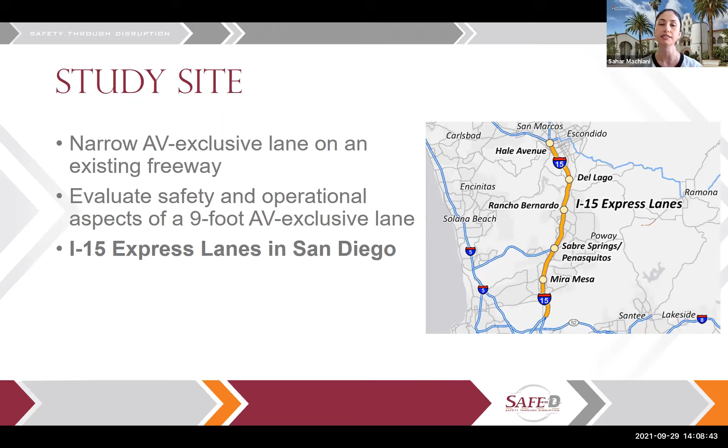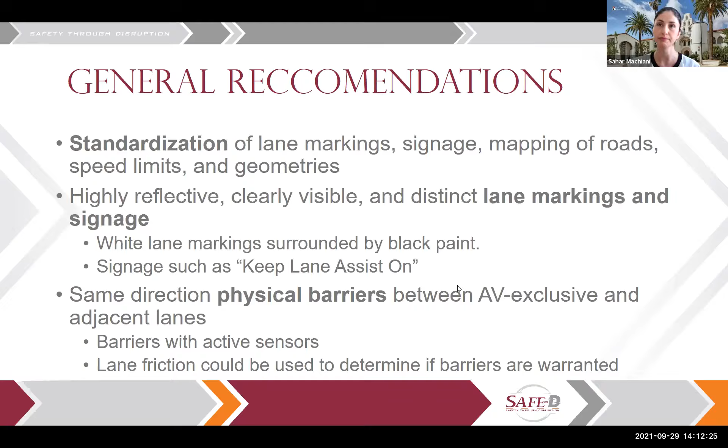Depending on traffic condition and market penetration rate, restrictions should be placed to designate the lane as AV exclusive, shared with HOVs, or open to all traffic. There are expert recommendations suggesting that an MPR of 10 to 30% may be sufficient to make AV exclusive lanes viable, and that an MPR over 50% may warrant the commissioning of AV exclusive lanes.

AV application limitations should be taken into consideration. For example, some AV lateral control systems, such as lane departure warning systems, are effective above certain speed, are operational for certain speed range, and do not perform well, for example, in sharp turns, during low visibility, or in foul weather conditions.

Early education and training at the driver's license level, as well as extensive public outreach via internet, social media, and other campaigns are recommended to explain how the lanes should be used or not used by AV and non-AV drivers. Simulation modeling with real-world traffic data specific to the candidate site could be significantly helpful in making informed decisions on feasibility, limitations, and specification of the AV exclusive lane.

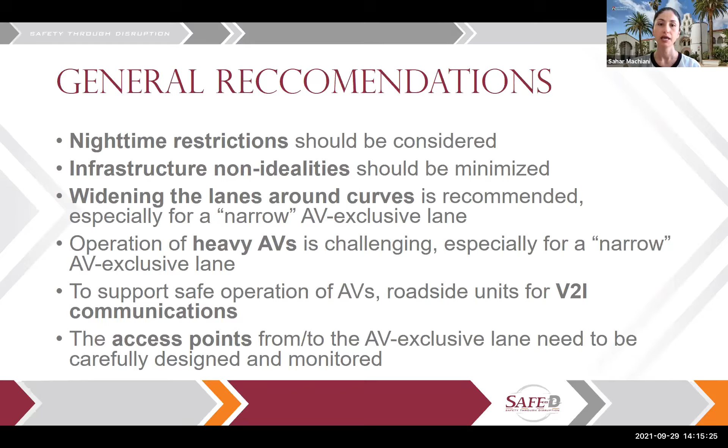Thank you so much. I'll be happy to answer questions after our next part of the presentation by Ali. So Ali, you could start presenting your work, and I'm gonna mute myself for now. All right, thank you, Sahar.

So I'll talk about the microsimulation part of our study. So here we're just going to do a brief introduction of the microsimulation. Based on a definition from the FHWA, microsimulation is modeling of individual vehicle movements on a second or sub-second basis for the purpose of assessing the traffic performance of highway and street systems, transit systems, and also pedestrians.

So there are several steps that go into developing a microsimulation. The first step is the data collection and preparation. For our case, it included collecting the lane configurations, collecting volumes, and some local parameters like that. And the second step is developing the base model, which is basically putting together all the information that you have in the software. The third step is error checking.

For our case, the error checking mostly involves checking that the alignment of the roads is fine, that things like vehicles disappearing don't happen, that the transition lanes are aligned right and connected right to the network, and all that sort of checking that you usually do with a simulation. The fourth step of the simulation is a calibration process where we run the simulation several times until we have a network and a simulation that fully represents our conditions that are currently on the road.

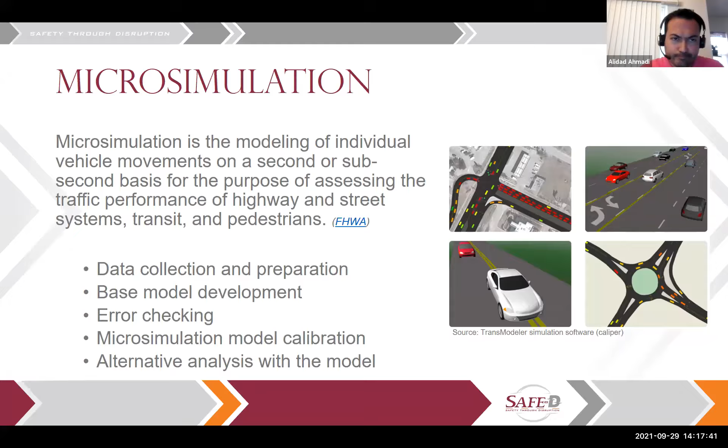So in our simulation study, we have 3 scenarios that we are looking at. The first scenario, which we call the existing scenario, is the baseline scenario with the existing network and the existing volumes that are on the roadway. The second scenario that we looked at, which is called AV, is using the same volumes, but with the adoption of some percentage of the AV vehicles on the road. And the third scenario, which is the ultimate scenario, which we call AVL, is existing volumes with the proposed AV exclusive lane and the adoption of the AV vehicles on the network.

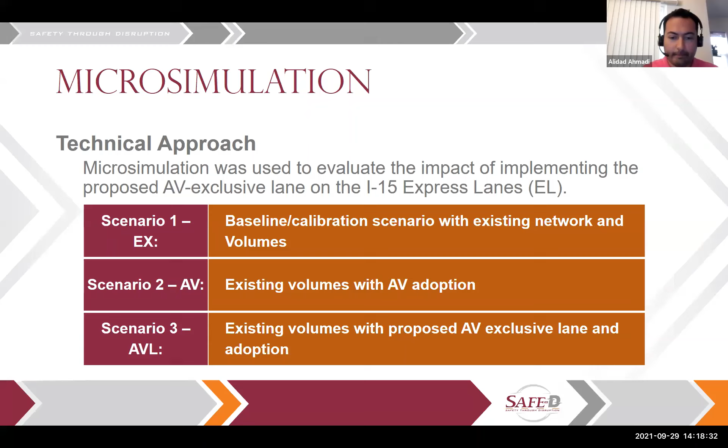Next, please. So the simulation network that we have put together here was conducted in the TransModeler SE edition. At the time, we had access to version 5, which was the latest one. The simulation network is a 5-mile long part of the I-15 corridor, bounded by State Route 56 on the north and State Route 163 on the south side. And there are 4 main interchanges in between these two boundaries, which is basically, if you're familiar with San Diego, one of the busy sections of the freeway during the commute hours.

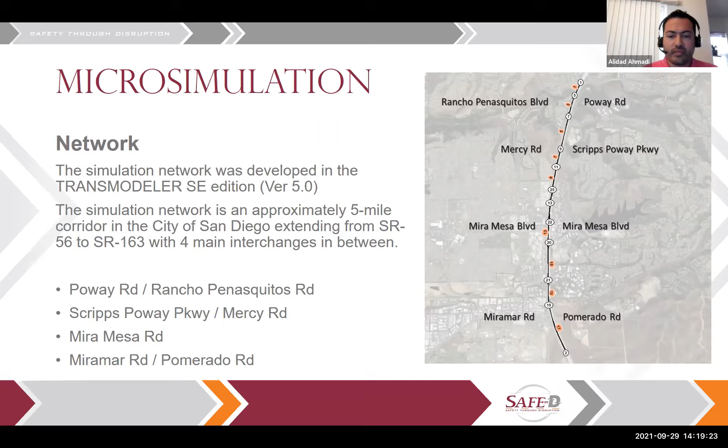So as Sahar mentioned, the I-15 has 2 configurations, separately for AM and PM commute hours. And here we have modeled it for the AM commute hour, which is basically 3 lanes going southbound and 1 lane going northbound. Next slide.

So the existing volumes that we used for this simulation exercise were received from Caltrans, and the data represents a typical weekday in the month of October of 2019. And the data collection was conducted for the AM peak hour, which is 7 to 9 AM. Next one, please.

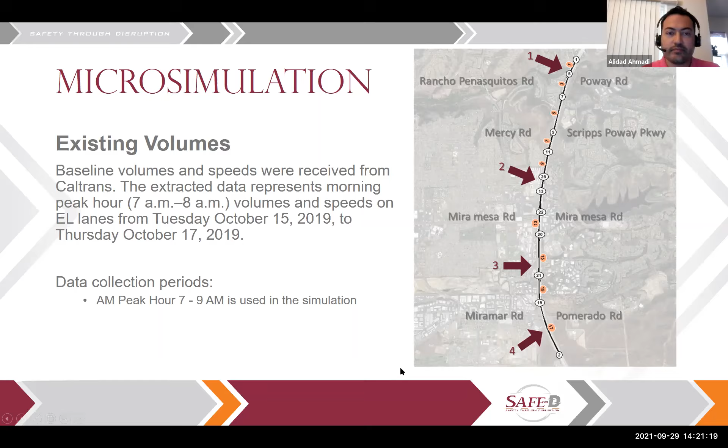So there are several assumptions that we have included in the simulation. The first assumption is road classification. We have gathered some of this information from Caltrans and some of it from the standard guidelines. Some of these assumptions are the saturation flow rates, the speed limits on the freeway, the free flow speed, and the speed distributions on the express lane. Another assumption made is that heavy vehicles were not modeled in the simulation, and the reason is that it was assumed that heavy vehicles are probably not allowed to use the express lane in the future.

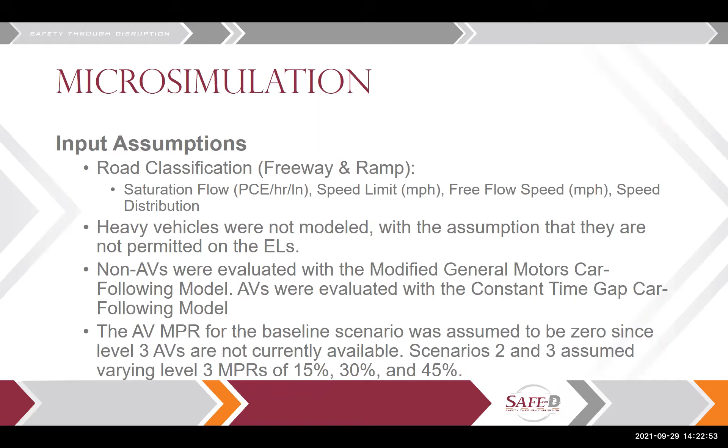And all of the non-AV vehicles in the simulation model were evaluated based on the modified General Motors car following model. And all the autonomous vehicles were evaluated using the constant time gap car following model. More details about those models can be found in the instruction files of the TransModeler software that we use. And at the end, the AVs were adopted in the simulation through 3 market penetration rates, or MPRs, which are 15% AVs on the road, 30% AVs, and then 45% AVs on the road. Next one.

And for those of you that are interested to know a little bit more about the simulation, the way that we implemented the AV lane on the network was by designating an exclusive AV lane in the software by defining a prohibition rule for the AVs to use certain lanes. So as you can see on the right picture, all the AVs were designated to use lane 1, which is the far left lane in the southbound direction, and lane 2 and lane 3 were specifically designated for non-AV vehicles.

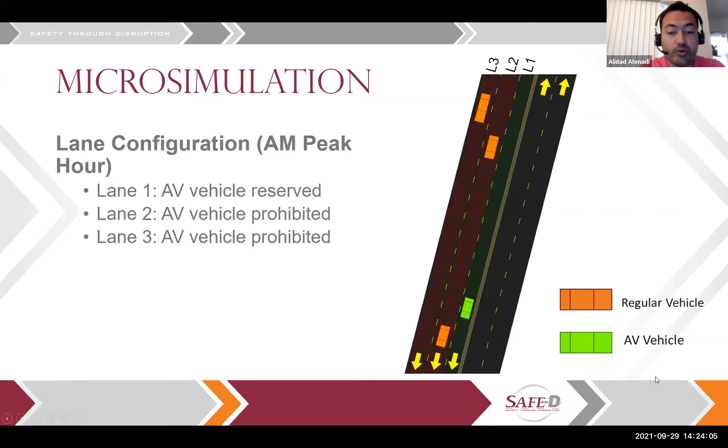So the only way an AV vehicle could get into lane 2 and lane 3 is if they're exiting the express lane, or if they're entering the express lane, then they would cross over those 2 lanes to get to the AV lane. And that's the trick that we used in the simulation network to simulate these new proposed conditions. Next one.

So the validation of our simulation included 60 minutes run of the simulation with the existing volumes and existing network, which also included a 15-minute warm-up time at the beginning of each simulation. We had several sensors along the road that collected the data, and then we compared those data to the field data that we have, the outputs from the simulation versus the numbers that we got from Caltrans.

We use a method called the GEH method, which is basically comparing those 2 values through some formulas, and then the low GEH value, which is recommended to be less than 5, is considered a well-calibrated model in a simulation. So on the right side, you see that we have the scenario starting from, for the southbound direction, starting from north. We feed the simulation network with the volumes, and then as they go south, we record the data on multiple locations, and we run the simulation several times. We get the GEH values until we get to a reasonable one, which indicates that we have a reasonably calibrated model to use.

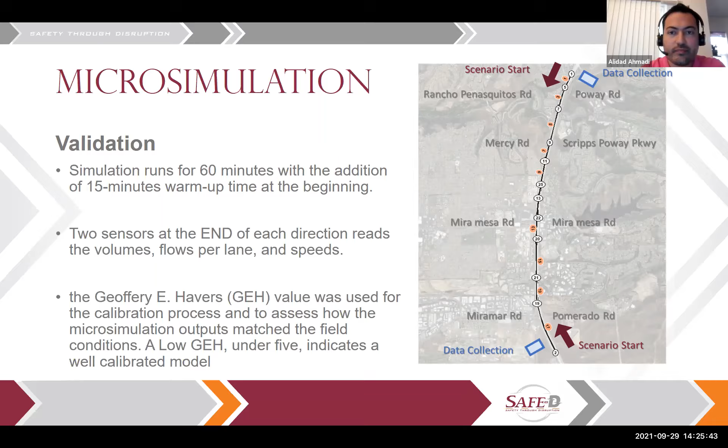Next one, please. So here is a summary of the calibration that we made. So as you can see on the table, the last 3 columns, there's a delta volume, which is delta between the field volumes and simulation volumes, delta average speed, which is speeds on the field versus speeds in the simulation, and at the end, the GEH value that was calculated.

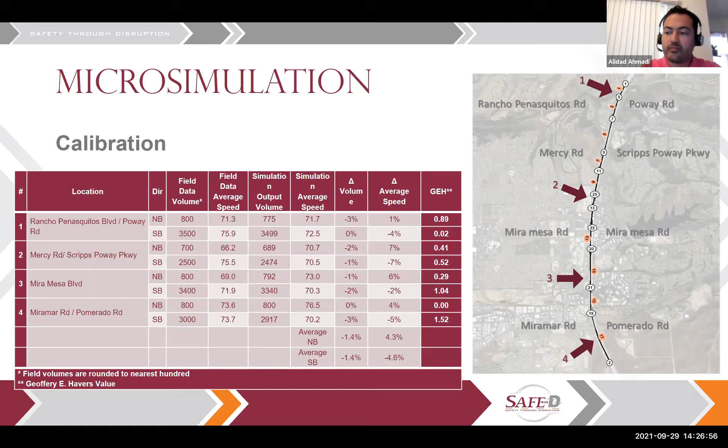And as you can see, on both northbound and southbound direction that we run the model, we got very reasonable numbers. The volumes were as close as 2% to the actual volumes from the field, and speeds were as close as 5% to actual speeds on the field. And same for the GEH value that we calculated. So all of the GEHs that we calculated were well below the 5.0 threshold. Next slide, please.

So the microsimulation results at the end were reported and reviewed under 4 following selected metrics, which is the traffic flows on multiple locations on the network, the average density, the average speed, and at the end, the speed differential between the lanes. So the speed differential between the lanes in our study was defined as the difference between the speed of the first lane, the speed lane, lane number 1, and the second lane. So in scenario 1 and 2, as you would imagine, it would be just regular vehicles on both lanes. But in scenario 3, that would be the AV lane versus a regular lane, because AVs now are exclusive in scenario 3. So moving on to next slide.

Again, for those of you interested in working with TransModeler, we have used the output for the vehicle to roadside communication sensors from the software. And basically how it works is that you can put several sensors along a roadway, and the software will calculate the speeds, the volumes, the flow, and the densities on each of those sensors or between those sensors.

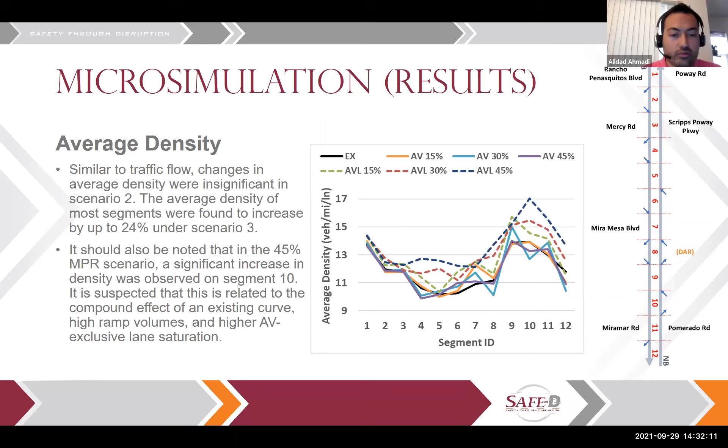Moving to the next slide, we looked at the average speeds. So again, under scenario 2, no measurable differences were observed on average speed compared to the baseline scenario. Under scenario 3, with the AV exclusive lane, we have some drop in the average speeds. The drop in the speeds was between 2 to 8 miles per hour, depending on the location of the segments that you're looking at. And again, around segments 9, 10, 11, which is just south of the direct access ramps, we have more drop in speeds, which aligns with the increase of the density that we observed in the previous slide.

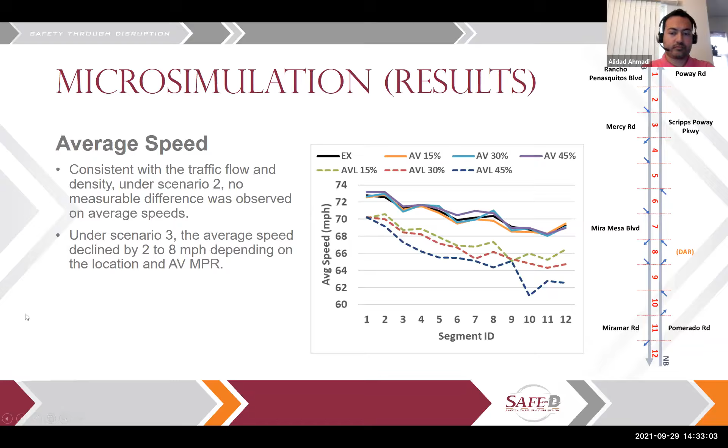And then the last metric that we looked at was the speed differential. As I mentioned, the speed differential is between lane 1, adjacent to the left shoulder, and the second lane. And in scenario 3, lane 1 is the AV exclusive lane, and lane 2 is a regular lane. Under scenario 2, which is just the adoption of the AVs, there was some minimal change observed in the speed differential between the two lanes, but not significantly. However, in scenario 3, there was significant speed differential observed between the speed lane, which is the AV exclusive lane, and the adjacent lane to it.

So it has been suggested in previous studies that high speed differential between, for example, HOV lanes and general purpose lanes could warrant installation of barriers between the two lanes. And the thresholds are different. Some suggest 10 miles per hour, some suggest 15 miles per hour. But this is one of the observations that we made in our simulation.

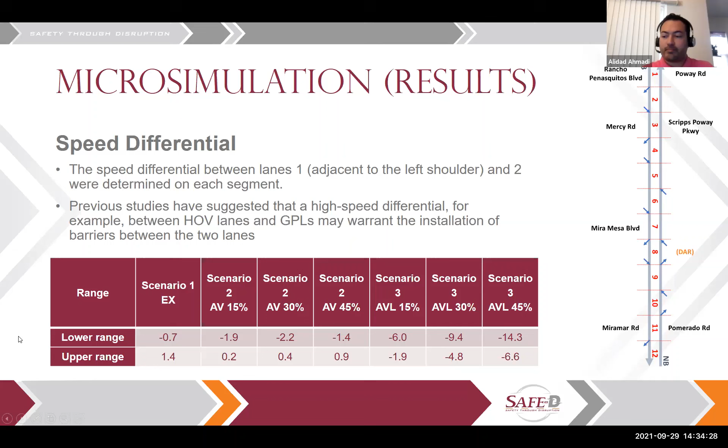And the last slide, just to summarize what we went through in the analysis. So from a corridor capacity standpoint, we observed that including the AV exclusive lane can improve the traffic flows. We observed it for this segment of the I-15 to increase by 15%, depending on the location. The densities were observed to increase by up to 24%, which again could be attributed to the fact that the AV lanes are better at maintaining lower gaps and more stable flows.

From a safety standpoint, our simulation does not reveal any significant flaws and shows some potential benefits as well, because we observed the average speeds to go down from 2 to 8 miles per hour, which, based on some studies, can be associated with lower crash severity. So lower speeds could be associated with lower crash severities, as suggested in some studies.

And at the end, the study that we did reveals the importance of understanding the impact of changing roadway characteristics, especially with the last metric, which shows that just by putting an AV exclusive lane under a certain market penetration rate, in our case 45%, the speed differentials could go up to 14, 15 miles per hour, which may require some consideration of placement of treatments or barriers. And as Sahar mentioned before, depending on the market penetration rate of the AVs, the number of exclusive AV lanes could change too. So after some point, it could change from 1 AV exclusive lane to 2 AV exclusive lanes to eliminate some of these safety effects.

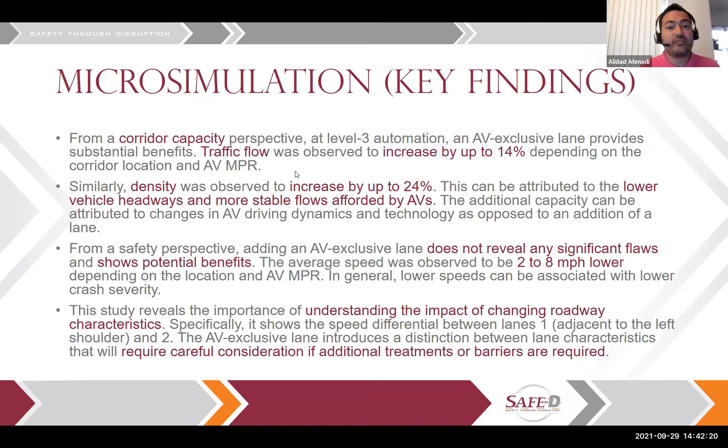Yeah, so our purpose here was mostly looking at the performance of the freeway. The AV simulation, specifically in the TransModeler software, is not as complicated as including all the factors into play, but I guess the whole settings for the AV vehicles in the software were set to be mostly focusing on the performance metrics rather than the individual AV vehicles in the simulation.

So yeah, and here we actually talked a lot to the people at Caliper, the company which makes this software, to learn about the AV and just make sure that it's representative of what's out there. And they have used a lot of factors to make it as simple as possible to simulate AV vehicles. But honestly, I think maybe there are some factors that they haven't even included in the software yet, or maybe it's coming in the future.

Thank you. And good to see you, Sue, also. Thanks. All right. I think we have another hand raised. You can go ahead and ask your question. Ralph, did you raise your hand? Yes, okay.